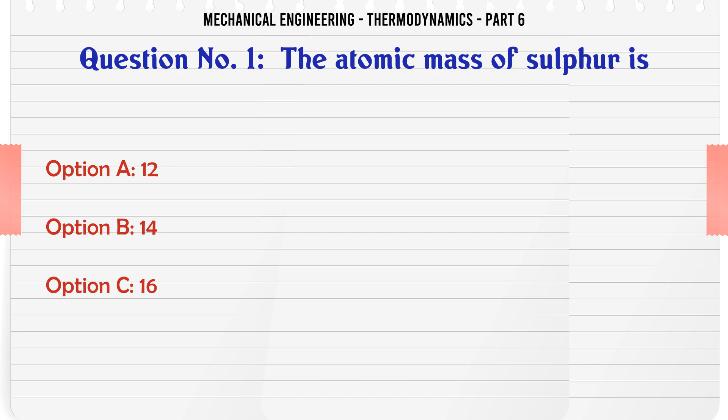The atomic mass of sulfur is A) 12, B) 14, C) 16, D) 32. The correct answer is 32.

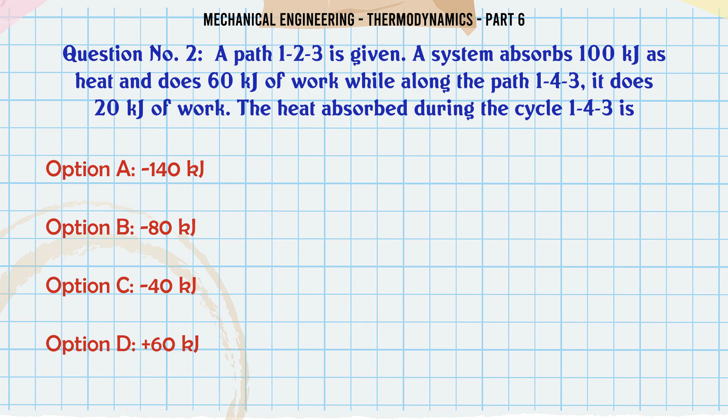A path 1, 2, 3 is given. A system absorbs 100 kJ as heat and does 60 kJ of work, while along the path 1, 4, 3 it does 20 kJ of work. The heat absorbed during the cycle 1, 4, 3 is A) -140 kJ, B) -80 kJ, C) -40 kJ, D) +60 kJ. The correct answer is 60 kJ.

The atomic mass of an element is the number of times the atom of that element is heavier than the hydrogen atom. A) True, B) False. The correct answer is true.

A cycle consisting of two isothermal and two isentropic processes is known as A) Carnot cycle, B) Stirling cycle, C) Ericsson cycle, D) Joule cycle. The correct answer is Carnot cycle.

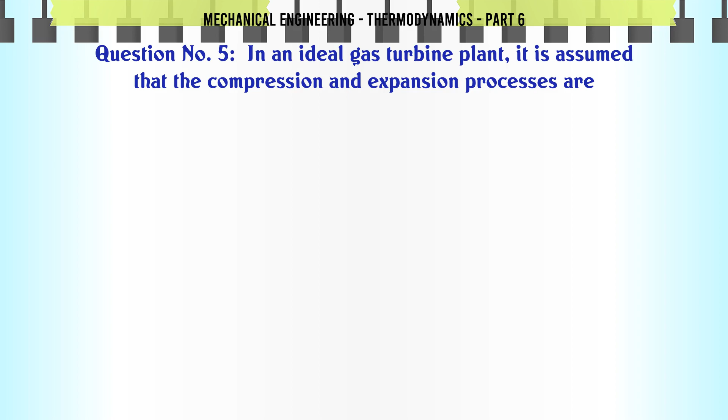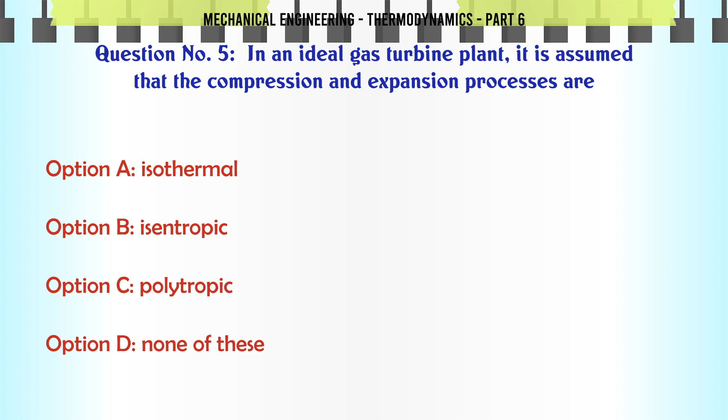In an ideal gas turbine plant, it is assumed that the compression and expansion processes are A) isothermal, B) isentropic, C) polytropic, D) none of these. The correct answer is isentropic.

When gas is heated at constant pressure, the heat supplied is utilized in A) increasing the internal energy of gas, B) doing some external work, C) increasing the internal energy of gas and also for doing some external work, D) none of the above. The correct answer is increasing the internal energy of gas and also for doing some external work.

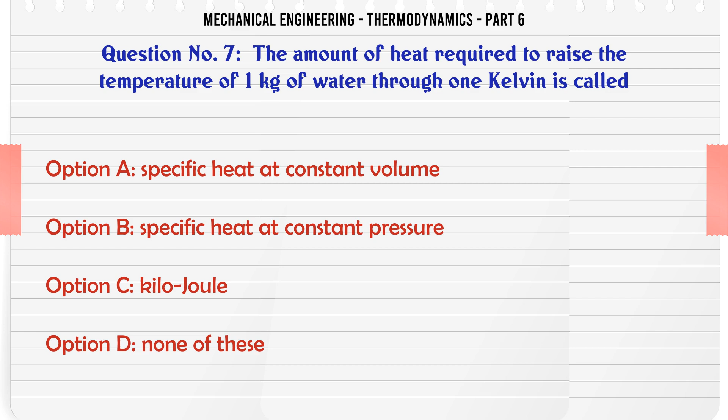The amount of heat required to raise the temperature of 1 kg of water through 1 Kelvin is called A) specific heat at constant volume, B) specific heat at constant pressure, C) kilojoule, D) none of these. The correct answer is kilojoule.

When wood is heated with a limited supply of air to a temperature not less than 280 C, the resulting fuel is A) coke, B) wood charcoal, C) bituminous coal, D) briquetted coal. The correct answer is wood charcoal.

The efficiency of diesel cycle increases with increase in cutoff. A) Yes, B) No. The correct answer is no.

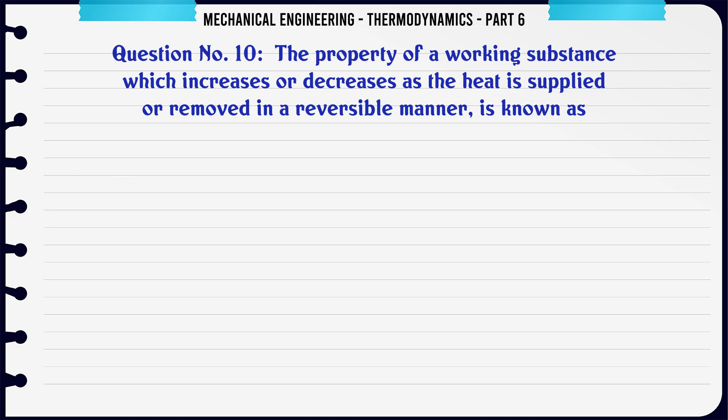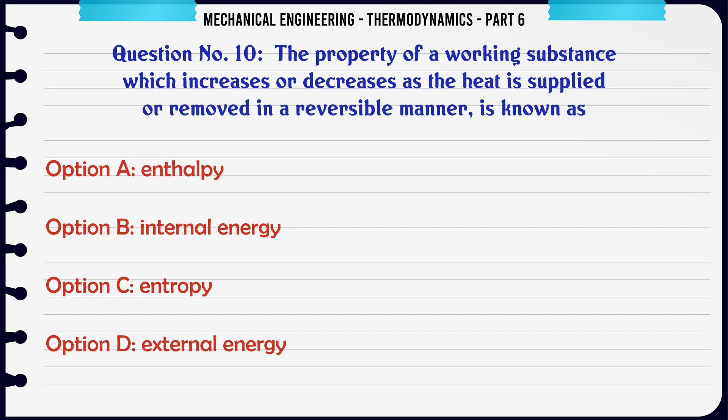The property of a working substance which increases or decreases as the heat is supplied or removed in a reversible manner is known as A) enthalpy, B) internal energy, C) entropy, D) external energy. The correct answer is entropy.

It is to make an engine working on a Carnot cycle A) possible, B) impossible. The correct answer is impossible.

The heating of a gas at constant pressure is governed by A) Boyle's law, B) Charles' law, C) Gay-Lussac law, D) Avogadro's law. The correct answer is Charles' law.

Reversed Joule cycle is known as A) Carnot cycle, B) Bell-Coleman cycle, C) Rankine cycle, D) Stirling cycle. The correct answer is Bell-Coleman cycle.

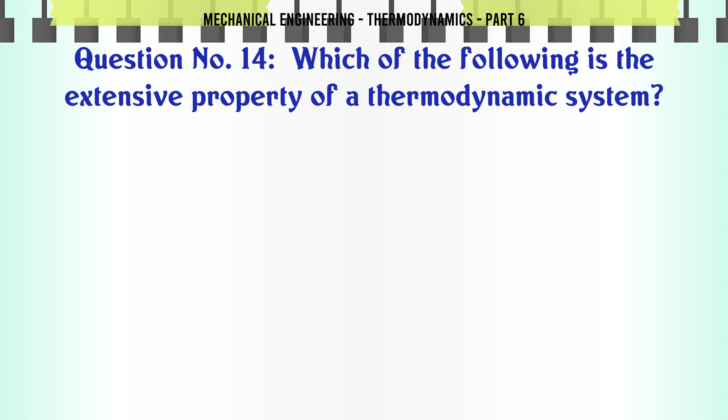Which of the following is the extensive property of a thermodynamic system? A) Pressure, B) Volume, C) Temperature, D) Density. The correct answer is volume.

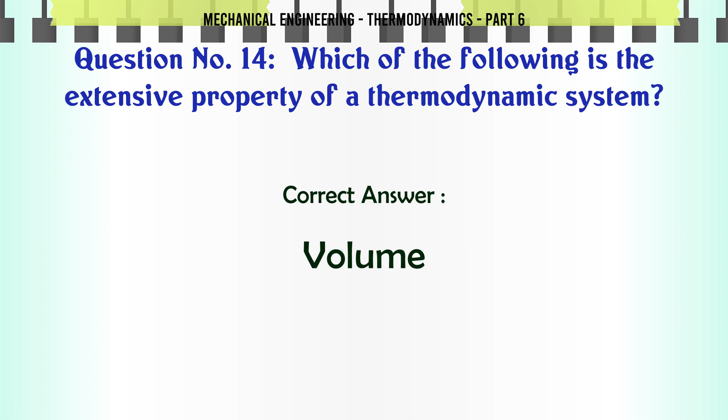It is impossible to transfer heat from a body at a lower temperature to a body at a higher temperature without the aid of an external source. A) Correct, B) Incorrect. The correct answer is correct.

1 kilowatt is equal to A) 1 Nm/s, B) 100 Nm/s, C) 1000 Nm/s, D) 1 x 10^6 Nm/s. The correct answer is 1000 Nm/s.

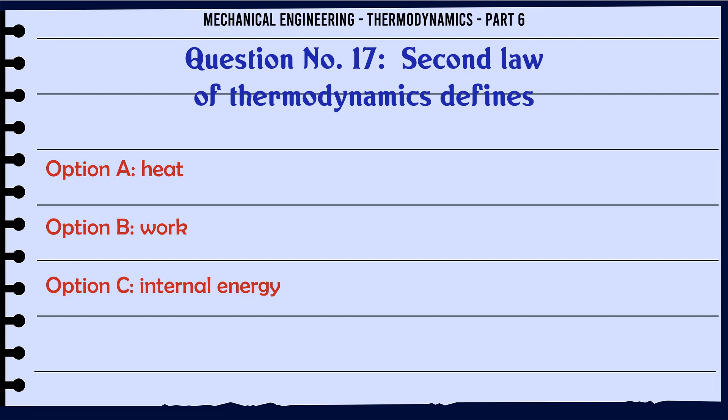Second law of thermodynamics defines A) heat, B) work, C) internal energy, D) entropy. The correct answer is entropy.

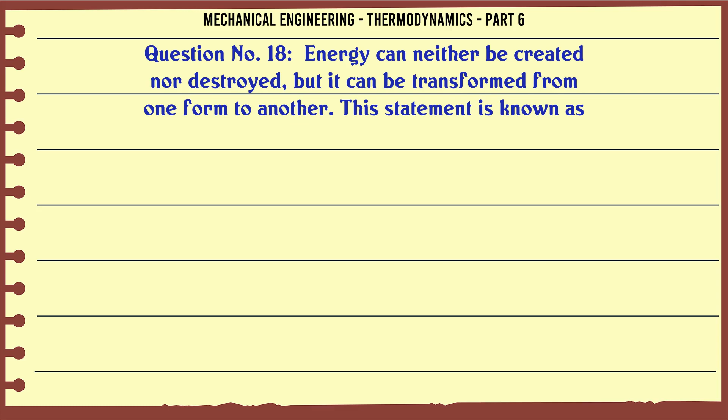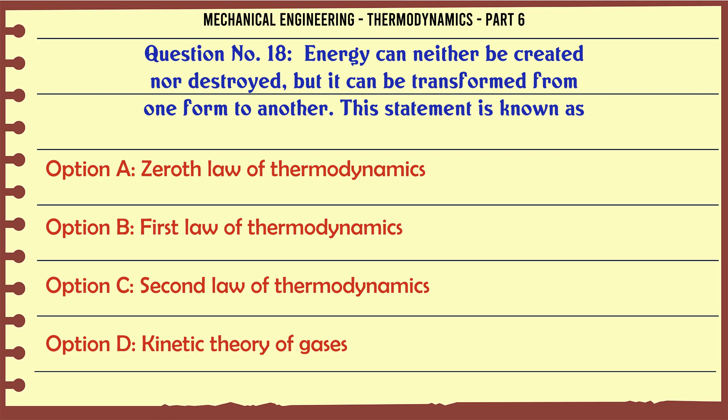Energy can neither be created nor destroyed, but it can be transformed from one form to another. This statement is known as A) Zeroth law of thermodynamics, B) First law of thermodynamics, C) Second law of thermodynamics, D) Kinetic theory of gases. The correct answer is first law of thermodynamics.

The value of 1 bar in SI units is equal to A) 1 x 10^2 N/m^2, B) 1 x 10^3 N/m^2, C) 1 x 10^4 N/m^2, D) 1 x 10^5 N/m^2. The correct answer is 1 x 10^5 N/m^2.

Petrol is distilled at A) 65 to 220 C, B) 220 to 345 C, C) 345 to 470 C, D) 470 to 550 C. The correct answer is 65 to 220 C.

If the carbon content in the bituminous coal is 78 to 81 percent, it is said to be coking bituminous coal. A) Agree, B) Disagree. The correct answer is disagree.

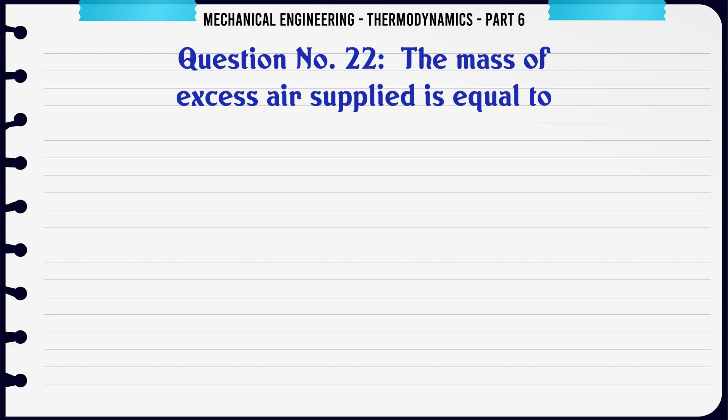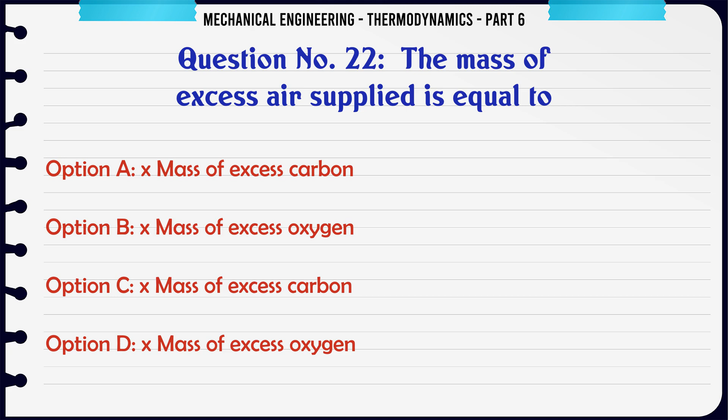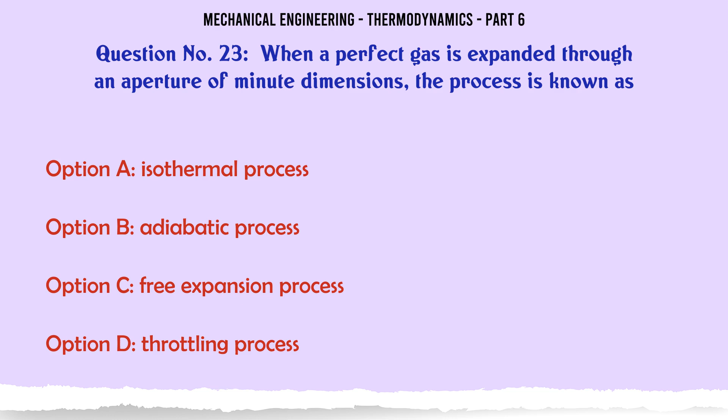When a perfect gas is expanded through an aperture of minute dimensions, the process is known as: A. Isothermal process, B. Adiabatic process, C. Free expansion process, D. Throttling process. The correct answer is throttling process.

Steam coal is: A. Pulverized coal, B. Brown coal, C. Coking bituminous coal, D. Non-coking bituminous coal. The correct answer is non-coking bituminous coal.

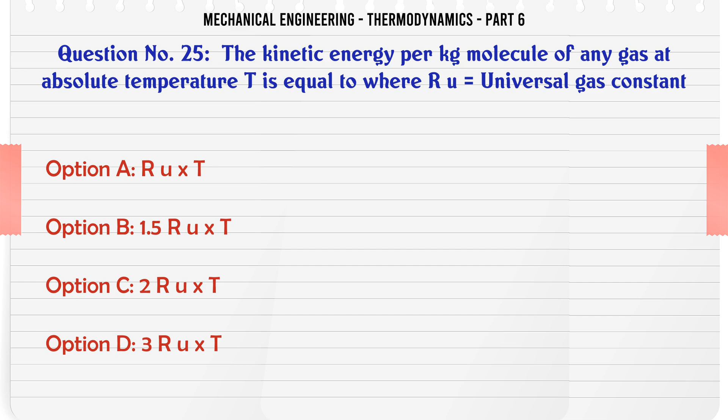The kinetic energy per kg molecule of any gas at absolute temperature T is equal to, where RU is universal gas constant: A. RU(xt), B. 1.5 RU(xt), C. 2 RU(xt), D. 3 RU(xt). The correct answer is 1.5 RU(xt).

The atomic mass of nitrogen is, compared to oxygen: A. equal to, B. less than, C. more than, D. none of these. The correct answer is less than.

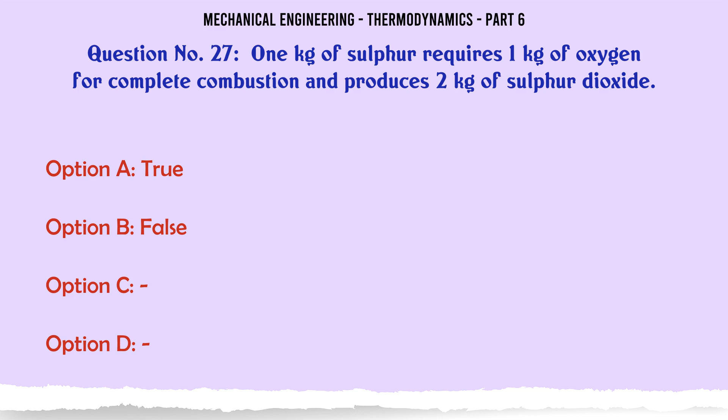1 kg of sulfur requires 1 kg of oxygen for complete combustion and produces 2 kg of sulfur dioxide. A. true, B. false. The correct answer is true.

The change of entropy when heat is absorbed by the gas is: A. positive, B. negative, C. positive or negative. The correct answer is positive.

A machine which violates the first law of thermodynamics is known as perpetual motion machine of the second kind. A. correct, B. incorrect. The correct answer is incorrect.

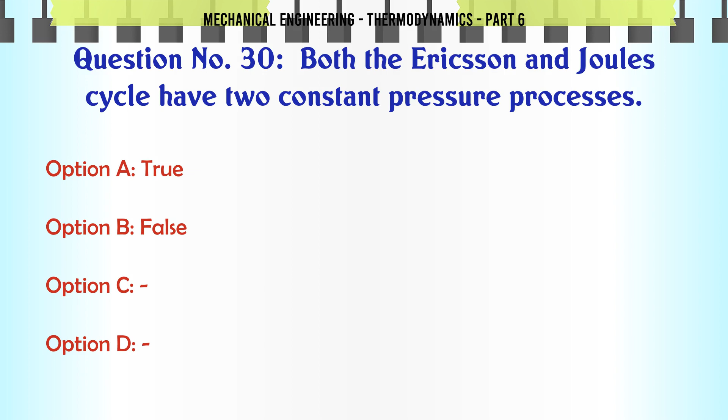Both the Ericsson and Joule's cycle have two constant pressure processes. A. true, B. false. The correct answer is true.

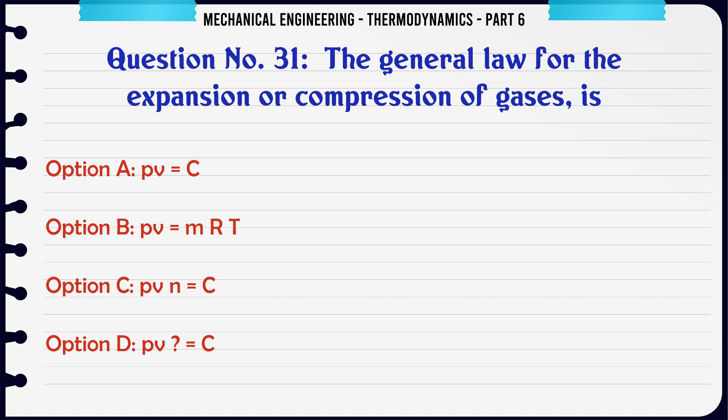The general law for the expansion or compression of gases is: A. PVC, B. PVMRT, C. PVNC, D. PVC. The correct answer is PVNC.

The heat energy stored in the gas and used for raising the temperature of the gas is known as: A. external energy, B. internal energy, C. kinetic energy, D. molecular energy. The correct answer is internal energy.

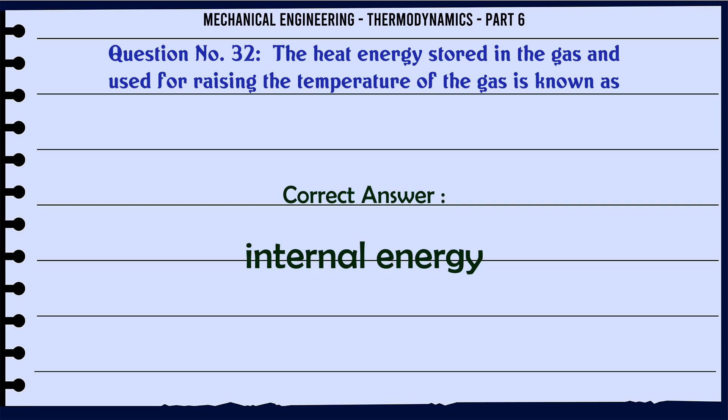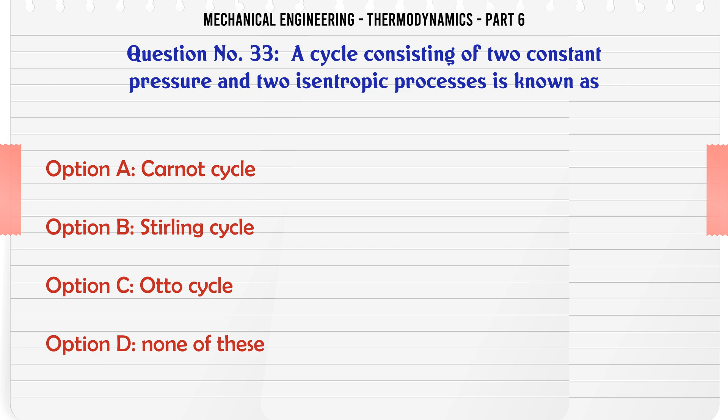A cycle consisting of two constant pressure and two isentropic processes is known as: A. Carnot cycle, B. Stirling cycle, C. Otto cycle, D. None of these. The correct answer is none of these.

When the gas is heated at constant pressure, the heat supplied: A. increases the internal energy of the gas, B. increases the temperature of the gas, C. does some external work during expansion, D. both B and C. The correct answer is both B and C.

The law that states the change of internal energy of a perfect gas is directly proportional to the change of temperature: A. Boyle's law, B. Charles' law, C. Gay-Lussac law, D. Joule's law. The correct answer is Joule's law.

A closed cycle gas turbine works on Joule's cycle. A. True, B. False. The correct answer is true.

The work done in a free expansion process is zero. A. True, B. False. The correct answer is true.

When a system changes its state from one equilibrium state to another equilibrium state, then the path of successive states through which the system has passed is known as: A. thermodynamic law, B. thermodynamic process, C. thermodynamic cycle, D. none of these. The correct answer is thermodynamic process.

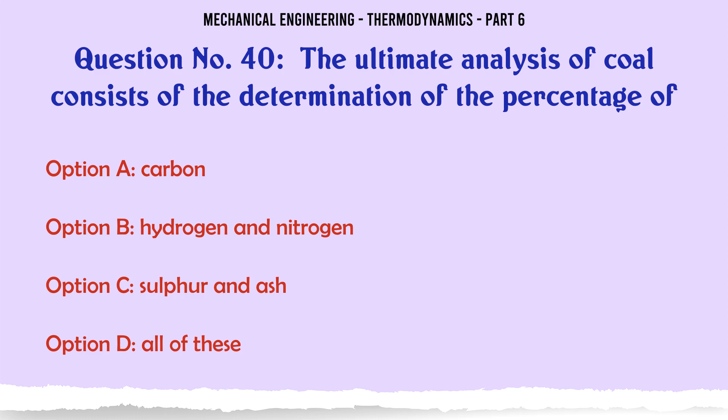The ultimate analysis of coal consists of the determination of the percentage of: A. carbon, B. hydrogen and nitrogen, C. sulfur and ash, D. all of these. The correct answer is all of these.

The change of entropy when heat is removed from the gas is positive. A. yes, B. no. The correct answer is no.

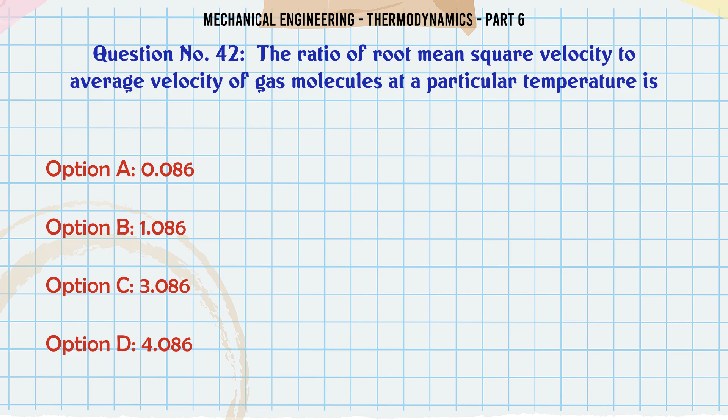The ratio of root mean square velocity to average velocity of gas molecules at a particular temperature is: A. 0.086, B. 1.086, C. 3.086, D. 4.086. The correct answer is 1.086.

First law of thermodynamics deals with: A. conservation of heat, B. conservation of momentum, C. conservation of mass, D. conservation of energy. The correct answer is conservation of energy.

Which of the following statement is correct? A. the heat and work are boundary phenomena, B. the heat and work represent the energy crossing the boundary of the system, C. the heat and work are path functions, D. all of the above. The correct answer is all of the above.

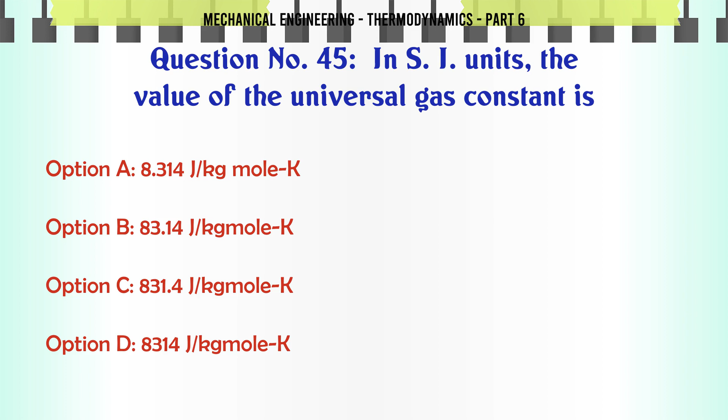In SI units, the value of the universal gas constant is: A. 8.314 J/kg mol K, B. 83.14 J/kg mol K, C. 831.4 J/kg mol K, D. 8314 J/kg mol K. The correct answer is 8314 J/kg mol K.